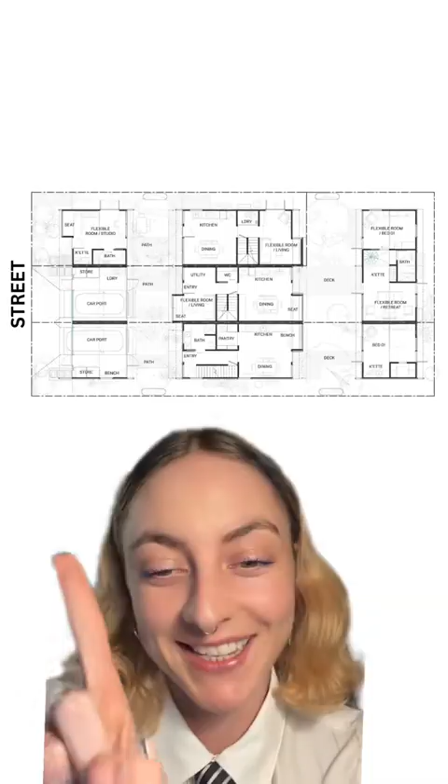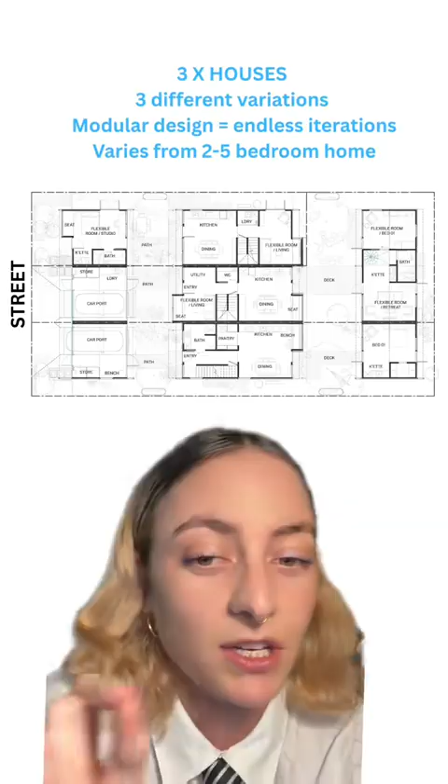But before we get into answering these questions, we all need a lesson in how to read architectural drawing. Now, this takes up a whole year of your architecture degree. I don't expect everyone to look at this drawing and know what they're getting. What I want you to understand is that there are actually 3 houses in this drawing. They are 3 different variations of this one house. Things can be swapped around depending on your needs. It varies from a 2 to 5 bedroom home, all within the same design, depending on what you pick.

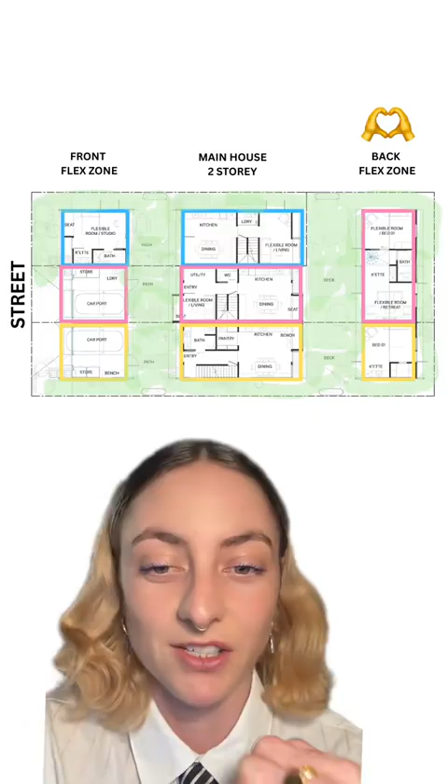Markup number 1: the most radical difference in this design versus others is that they've split what is normally a typical home into 3 different portions. I've nicknamed it the front flex zone, the main house, and the back flex zone. I've called it this myself, it hasn't come from the architect, so I don't want to put this on them. It's just a way of communicating the role of breaking up the home into these 3 different ideas.

So, to talk you through this plan, the street here is where you would drive in if you had a car. There's a front zone that can be used for flexible purposes. You move through a garden courtyard and into the main house. This is what we're calling the fixed component, even though if you get into the nitty-gritty of their planning, even this floor plan can be shifted around depending on your needs. Then, depending on the size of your lot of land, you can either do another courtyard followed by another bit of building.

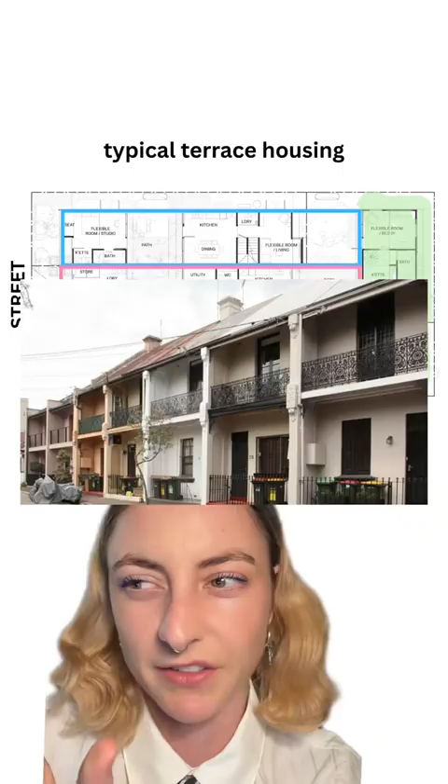The reason this is radical is because this would be your typical terrace house plan. So if you've ever rented in Sydney or Melbourne and gone to look at a terrace building, this is probably what you got. Often a small area out the front, often used for bin storage, and then a room out the back, which 9 times out of 10 gets turned into a car park. There's virtually no room for green space, and having light only from 2 ends of the building, because it's built wall to wall, makes them quite dark.

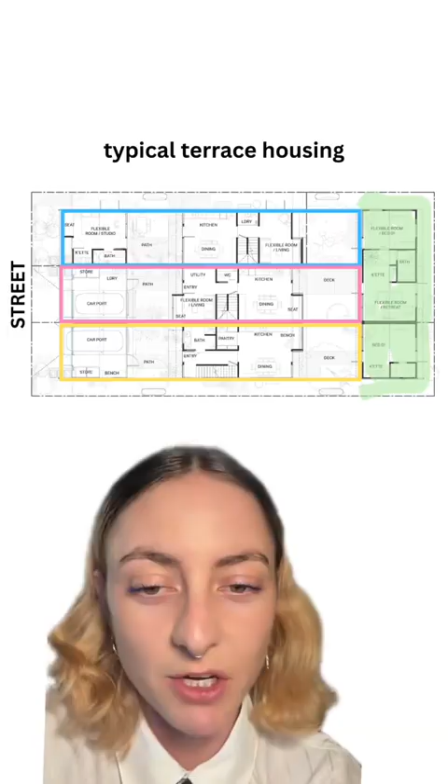Now, a lot of these get retrofitted with skylights, and that's totally okay. They have little light wells in the middle of their plans, but you can see when you compare a typical terrace house plan like this to something like this, we're all of a sudden seeing a radical uptake in landscaping opportunities. So just to compare even more clearly, this would be a typical terrace home, and what we're seeing in this plan is a complete deconstruction of why and where you put landscaping.

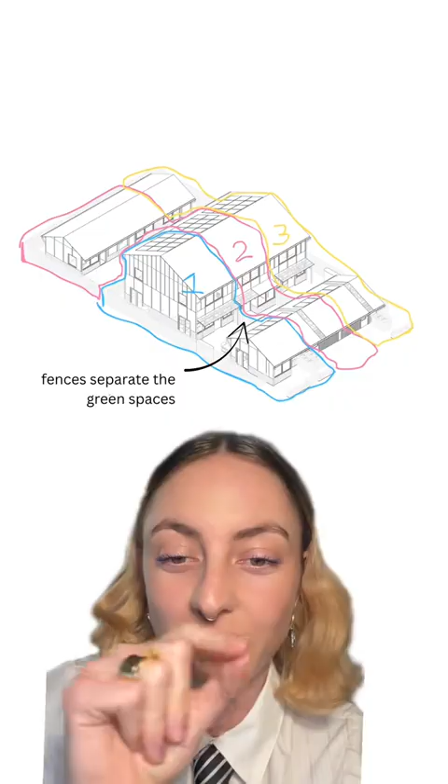So now that we've established that this diagram is showing us 3 different ways you can plan this design, and that each of the 3 buildings is made up of 3 different buildings within the one plan, which is a radical departure from a typical terrace house, now we can have a conversation about how this responds to multi-generational living.

At the core of good multi-generational living is the appreciation that having more people in one home means you need differing layers of privacy. So that if you need some time away from the in-laws, or from Nana, or from your teenage kid, you've got a space to go. But it also means it has to be able to cater to when everyone wants to come together.

Now, this requires some pretty nifty planning to be able to have spaces that flex and change as a family grows. Let's see how this design deals with that.

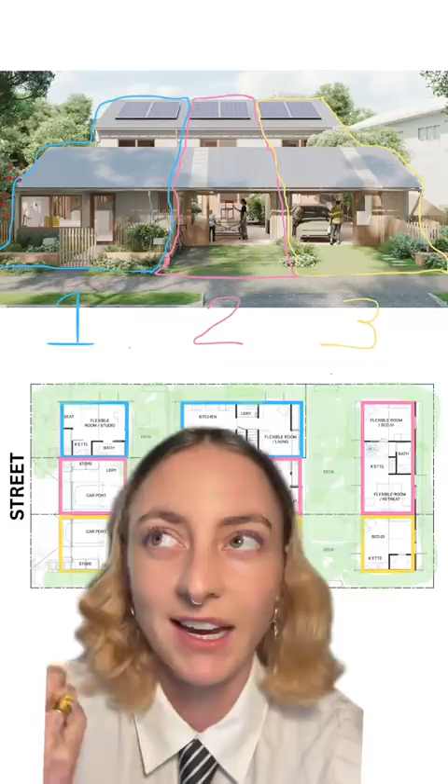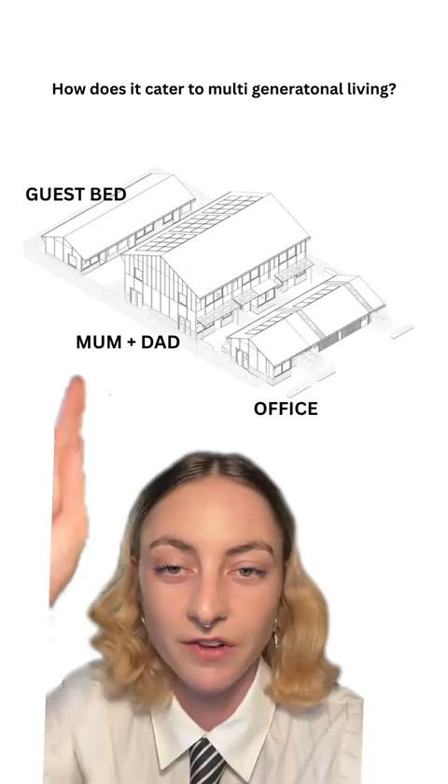Let's say a couple buys this home first. They don't have any kids yet. One of them might work from home and have friends that live interstate, so they've kitted out their version of this as a home office in the front. They live in the main house, and they've got a guest bed out the back. Time goes on, mum and dad expand into a family of 4, but now they need some help.

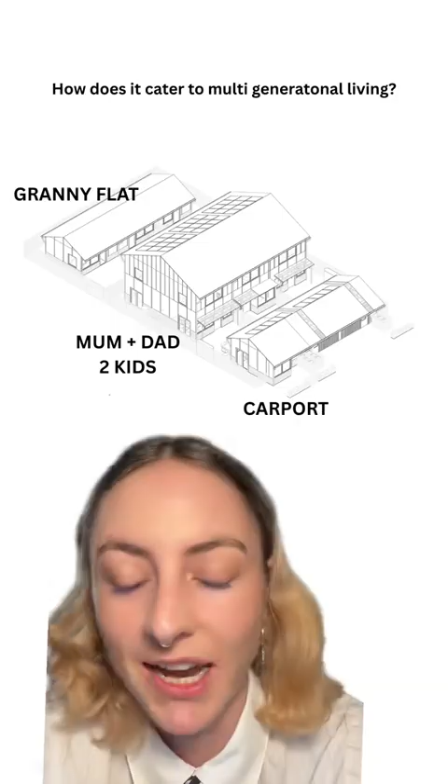So they've converted their guest bed into a granny flat, and parents come over and stay every now and then. Dad's got a dad bod, so he's converted the first portion from a home office into a gym. Two kids have started to grow up, and now they need a car because the kids have soccer training or swimming lessons. I think you get where I'm going with this.

By providing two flexible zones at the front and at the back of the lot, they've enabled everyone to be able to make a house that fits whatever need they have.

And I actually did my homework here. One of the reasons this part 2 video took so long to follow up is because I actually reached out to the architects. So just call me an investigative journalist. But I actually love what they wrote here, so I'm just going to read it verbatim.

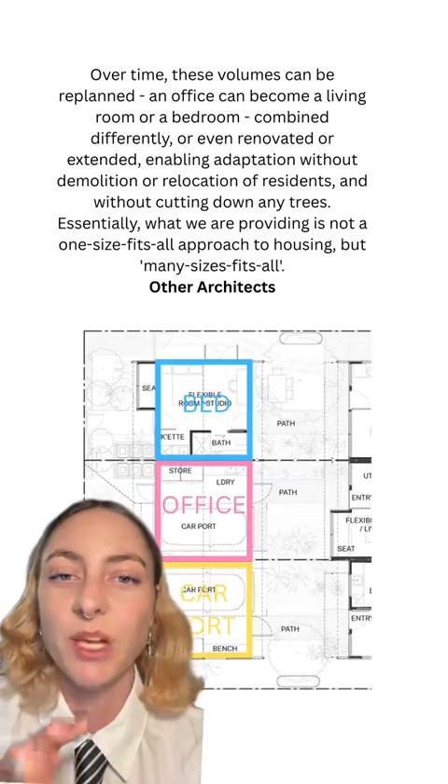This is their response to how does this deal with multi-generational living: Over time, these volumes can be replanned. An office can become a living room or a bedroom, combined differently or even renovated or extended, enabling adaptation without demolition or relocation of residents and without cutting down any trees or existing landscape. Essentially, what we are providing is not a one-size-fits-all approach to housing, but many sizes fits all.

And what they're getting at is that providing a house that has many sizes to it, so the main house, the small house, the studio, everyone has a space. And that is the key to intergenerational living.

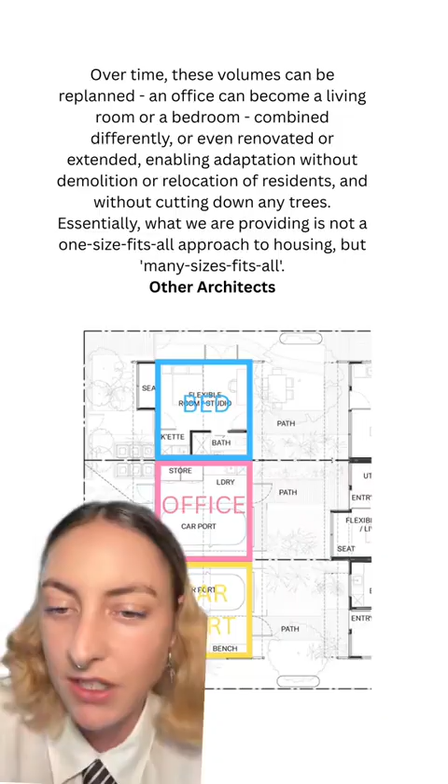I think also what you can probably pick up on is that the bedrooms and the studios are separated by landscape. So you're always going to be able to access that level of privacy that you need, but then they're joined by communal areas that you can come together and have dinner or entertain or whatever it is that you like to do in your home.

I wouldn't be surprised if some people look at this and go, how the hell did they fit that on a typical site? This isn't going to work, my house can't do that. And planning efficiently is really hard. This is the skill of the architect. They have worked at this plan mercilessly to make it efficient so that they can pack in as much program as you can into a typical lot size. A big sprawling house is really forgiving. The reason you are getting so much amenity is because of the skill of the architects working on this plan.

Now, the second most commonly asked question I got was, this doesn't look like it's good for mobility issues. And this is why I don't think you should ever listen to people on TikTok - not even me, don't even trust me. But I can say that this came directly from the architect, so trust this one bit.

Every single one of these homes is designed to either gold or silver standard for livable housing design. It's a document that sets out the technical provisions required to enable dwellings to better meet the needs of the community for older people and people with mobility limitations.

I'm once again going to read verbatim from what they replied to me with: Where our design differs is that it includes separate building volumes at the front and rear that can be used as self-contained, step-free and fully accessible dwellings - so a granny flat is basically what we'd all call it. Spaces would be perfect for an occupant with mobility issues or someone looking to downsize but remain in place.

So I think it's important to realize that this is for a target market. And if you don't fit into that, no one's making you live in these. If you're a single person, a five-bedroom household is probably not what you're meant to be looking at.

I've got one minute left. There's no way I'm getting through everything I wanted to talk to you about, but I'm not going to read through this - these are ways that it's dealt with sustainability. But what I do want to talk about is how can it do this without having a site response?

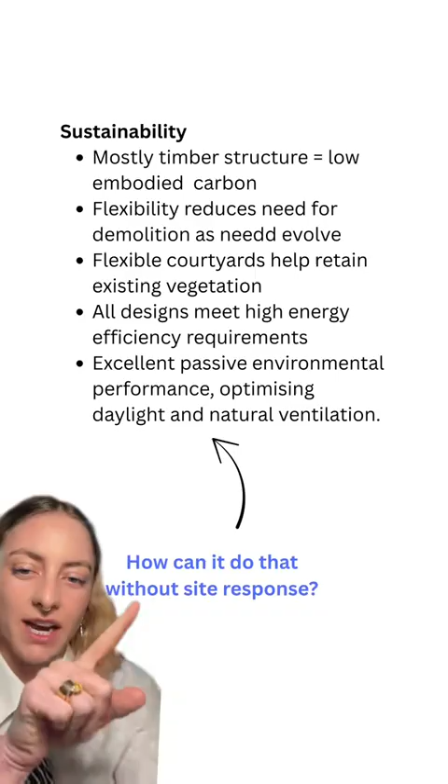Once again, this comes down to the great use of courtyards. No matter which way this plot faced, because of the breakup of space with landscape, you've got ample opportunity to access daylight and passive ventilation, and that's going to lower your reliance on things that use energy like heating and cooling and lighting. Fifteen seconds left.

Lastly, it offers a scalable alternative to urban sprawl. I don't have time to educate you on why urban sprawl is really bad for our environment. I strongly encourage you looking it up - there's heaps of people that make content about it.